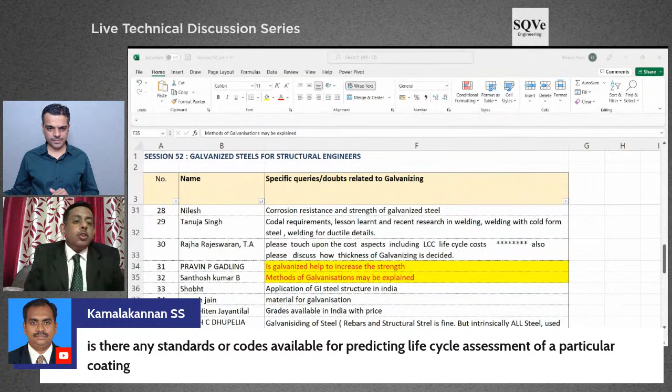Continuous galvanizing is for cold rolled sheets, which go for automobile or construction applications, where a coil goes through an annealing cycle to heat up the steel surface. After annealing, the surface is completely reduced so that you have virgin iron, which goes directly, without coming into contact with the atmosphere, into the zinc bath and comes out with the coating. This is called the continuous galvanizing process, which is very much required for cold rolled sheets used for automobiles and for roofing applications.

You'll see zinc galvanized steel roofing in a lot of places; those are made this way. Automobiles, like your car body, the roof of the car, are all made of galvanized sheets, and that is the galvanizing process. The second process is for constructions or where heavy engineering is involved; you'll see that the thickness of the strips is quite high, where you cannot apply the continuous galvanizing process.

There you need batch galvanizing, where you have better control, a slower process, but you get a good coating. In automotive or continuous galvanizing, the basic difference is the coating thickness is very low, about 8 to 10 microns, maximum going up to 120 to 140 GSM (gram per square meter). But in batch galvanizing, the GSM or amount of coating is quite high, above 200 in most cases.

In batch galvanizing, once you have the component, it has to be cleaned properly with degreasing or acid degreasing process. After that, you need to put some flux. Flux is an agent which makes a bond between the steel surface and the galvanized zinc. So you put the flux, and the flux-coated samples are dipped inside the liquid bath for some time. In continuous galvanizing, dipping is only a few seconds.

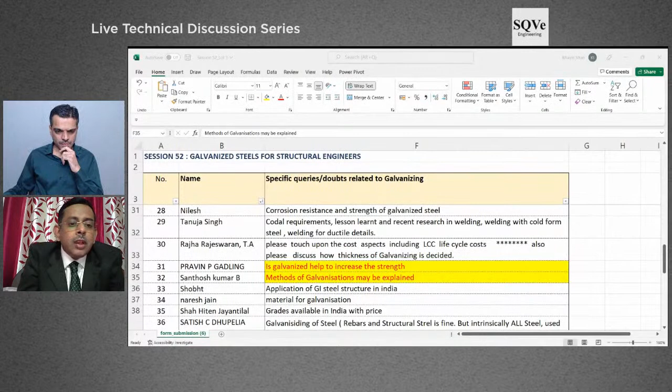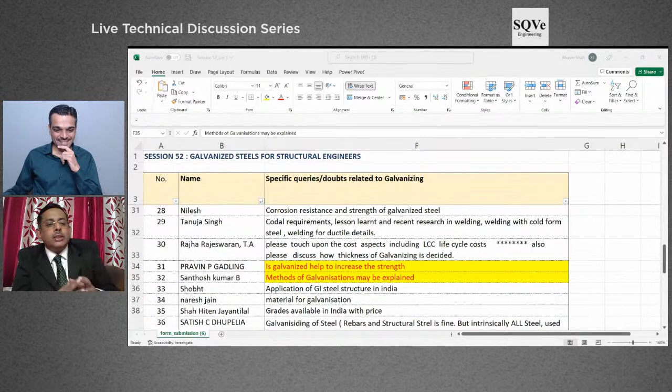I think that covers it, but if we go into the details of the process, it actually takes a longer time, and this session isn't enough because the process is, I think, a 20-25 day course. It's a semester process for this. So I tried to cover it, but there are a lot of YouTube videos you can always have a look at, and a lot of books where you can look at the process itself. But we can discuss the details in a longer session.

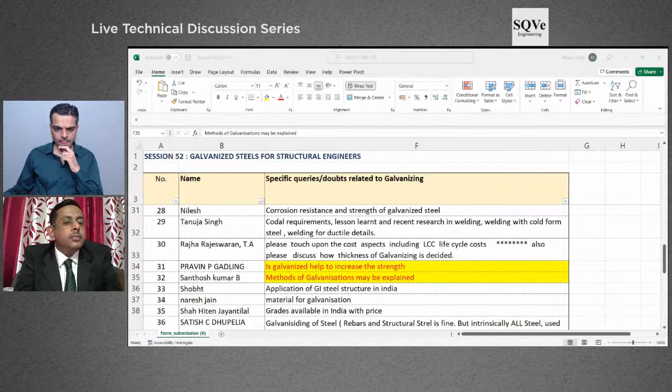The next question, which is highlighted, and I think someone also asked from the live chat, is whether galvanizing the steel will increase or decrease the strength for the structures.

Yeah, that confusion—when I started my career, I had that confusion too. Galvanizing practically has nothing to do with the strength. It does not change the strength. Whatever is your incoming material strength, you have the same strength on the galvanized part. Galvanizing is a process of coating something; it does not change the microstructure. It does not have any role in the microstructure because the hot dipping process is a surface phenomenon, done at 460 degrees, and normally for a few minutes there is no change observed in the steel metallurgy or microstructure. So galvanizing does not have any role in determining the strength of material or changing the properties of material. Galvanizing is a coating process to give you better corrosion protection.

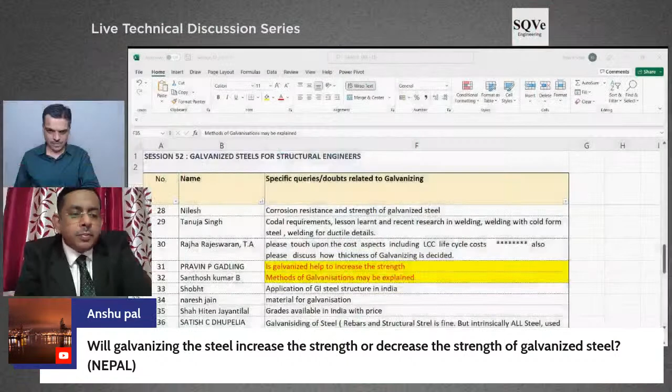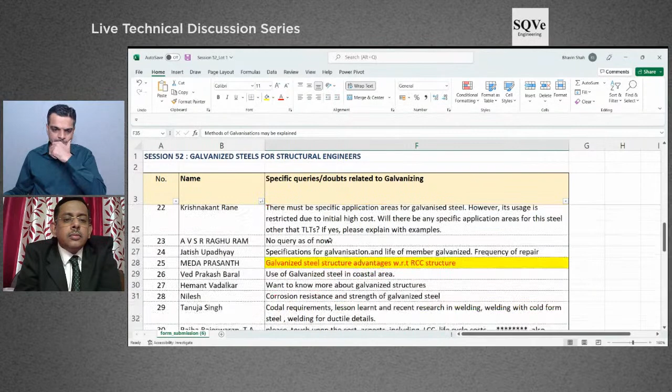There are a few interesting questions which are highlighted. I think we can take this one: what are the long-term benefits of galvanization?

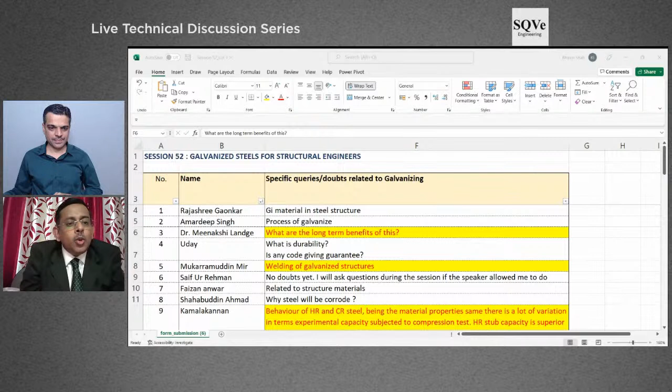Yes, long-term benefits. You are investing something because galvanizing is an extra process—you're putting something extra on the steel. Like add-ons: once you go to a pizza shop or any restaurant, if you ask for something extra, they will charge extra—extra cheese topping, extra sauce, anything is chargeable. Here also, you are putting an extra coating over the galvanized steel, so it is a chargeable thing.

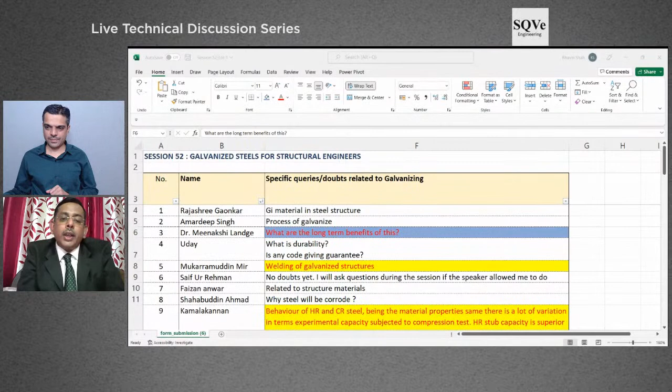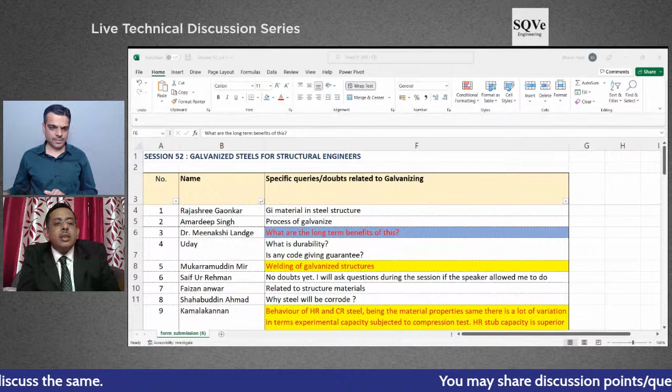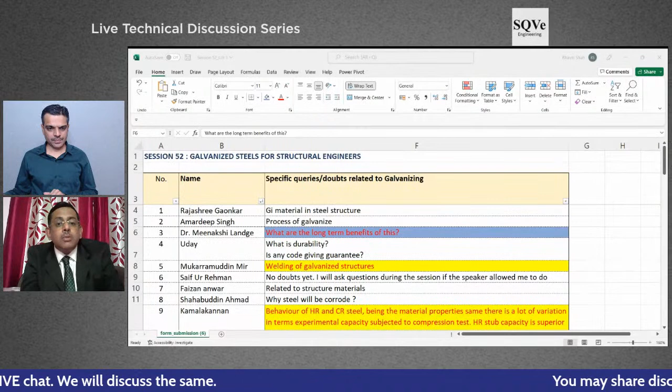But the long-term benefit is quite high, in terms of protection of the steel, because steel is a very precious thing. You are putting it inside your building, and you don't want to change it every 2 or 3 years. Steel will naturally degrade against the atmosphere because atmospheric corrosion will always take place, and nobody can afford changing the steel every 4 or 5 years since it is a structural part. Galvanizing helps in that area. Galvanizing increases, as per the technicality, 4 to 5 times your corrosion life. What needs to be replaced in 20 years can be shifted to 60 or 70 years.

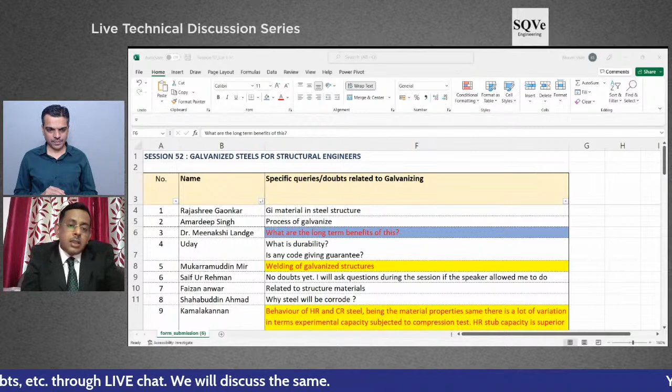Galvanizing means you are having good protection. Weathering, that means when atmosphere wants to react with the steel surface, it has to come across a barrier of 200 to 300 microns of galvanized layer. Then it can touch the steel. Like in a war, we always protect the king. In a chess game, the pawns cover the king. Here it is the same thing - others will get time before reaching your king. Atmosphere, meaning oxygen and other pollutants, will take longer time to penetrate because the galvanized surface is there.

Galvanizing increases the corrosion life of the steel surface significantly - not just a bit - typically 2 to 3 times, or sometimes even 4 times. Also, it increases the luster of the steel surface, giving an aesthetic benefit since the galvanized surface is lustrous. This improves the aesthetic point of view besides the corrosion protection. But mainly, galvanizing increases the corrosion protection manifold.

I think that answers the question properly. Yes, yes.

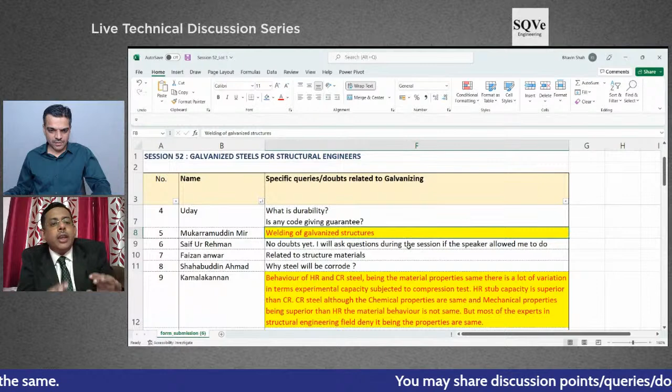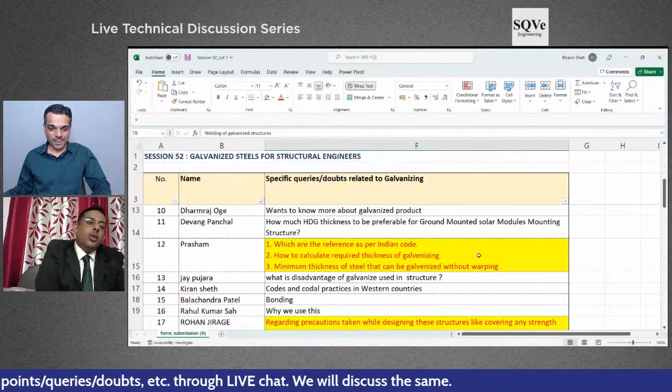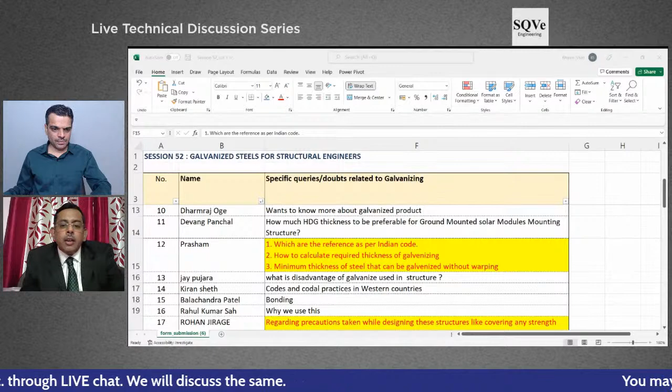Which are the references as per Indian code? There are many references, and most of them are adaptations of ASTM standards, which are most helpful here. I'll mention a few of the ASTM and IS standards. IS 4759 is the mother standard for it, and ASTM A123 is the base standard. Based on that, IS 4759 is adopted. There are a few other related standards, but these two need to be discussed thoroughly, covering coating relations, the relationship between microstructure and coating, and what sort of coating is needed for different sections. For example, under 2 but not less than 1.2, you need a minimum of 340 grams per square meter coating. These details are mentioned in IS 4759, along with the amount of sampling and what sort of tests you will be doing. IS 4759, therefore, is the basic standard for the galvanizing process, adapted from ASTM A123.

Then the second question, which I think most engineers are interested in: how to calculate the required thickness for galvanizing.

You don't need to calculate it yourself, because in most cases, once you buy it, there is already a calculation process - it will be specified how much GSM coating is given. By the eddy current method or other cross-check methods like metallurgical methods, you can verify that. Normally, 1 micron means 8 grams per square meter - there is a calculation, but it involves a lot of effort and errors can occur. Normally, through a test certificate, you can cross-verify that a given coating thickness corresponds to a certain GSM. There is a relationship between coating thickness in microns versus GSM, but ultimately, the test certificate will mention the GSM. By ASTM standard or IS 4759, the minimum value of average mass coating should be mentioned based on the sectional properties - for example, for a tube of 10 millimeter diameter and over, you need to maintain a minimum of 300 GSM coating, as given in the standards. So based on the test certificate, you can always judge what amount of coating has been given.

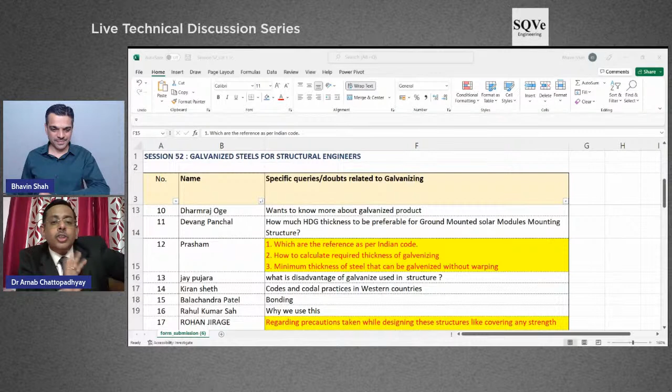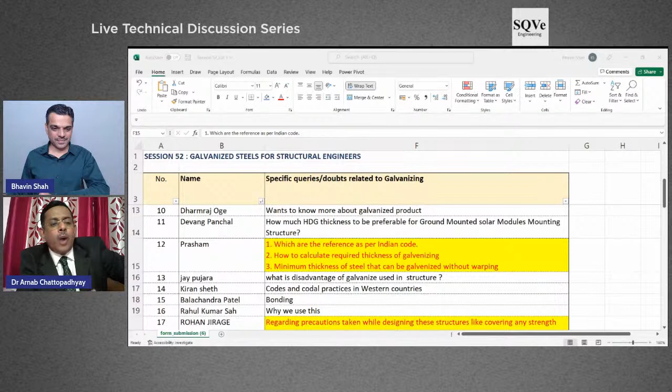The minimum thickness of steel that can be galvanized - for continuous galvanizing, I have seen 0.12 millimeter. Sometimes thin sheets for roofing or automotive dooring applications, around 0.1 millimeter galvanized steel, can also be galvanized. So thickness is not really a problem. But you cannot do this in batch galvanizing because it is not economically viable. However, in continuous galvanizing, many steel plants are producing 0.1 or 0.2 millimeter steel day and day out.

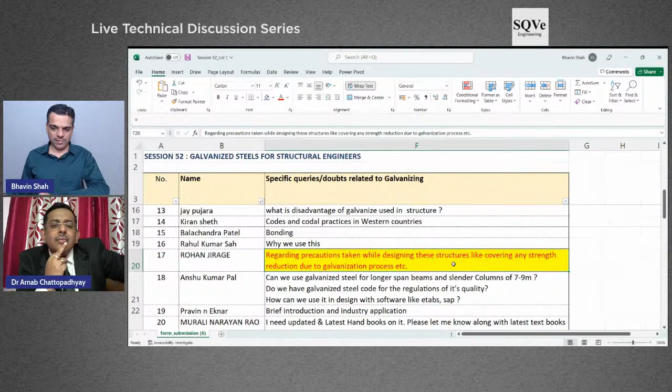Okay, I think this question is answered, right? Regarding precautions to be taken while designing these structures, like covering any strength reduction due to the galvanization process. Yes, galvanizing has nothing to do with the strength.

This galvanized steel structures' advantages with respect to RCC structures - yes, very interesting question, because India has started using galvanized rebars in place of plain rebars. There is a plant, I think in Punjab, producing successfully. This galvanizing structures topic is also interesting. Number one, it does not change the requirement of RCC structures, because whatever the basic requirements are, all are satisfied by galvanized structures, used in terms of bond strength, cement to steel ratio - there is no change.

But what is changing is the corrosion life. It increases 4 to 5 times inside the cement or concrete atmosphere, which is a kind of basic atmosphere. The advantage of galvanized steel is that it gives protection in a wide range of pH. We are aware of the importance of pH. From about 5 to 11 pH, all galvanized structures are stable, which is not possible with bare rebars. Bare rebars will always corrode inside the concrete, but galvanized structures don't corrode.

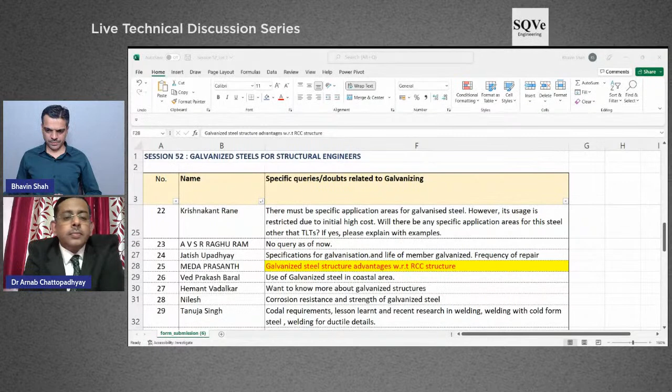This quality of steel used for galvanization - can we take up this point? Yes, good question. Quality as per the requirement should be determined, because you need to have your own quality requirement. For galvanizing, anything and everything can be galvanized.

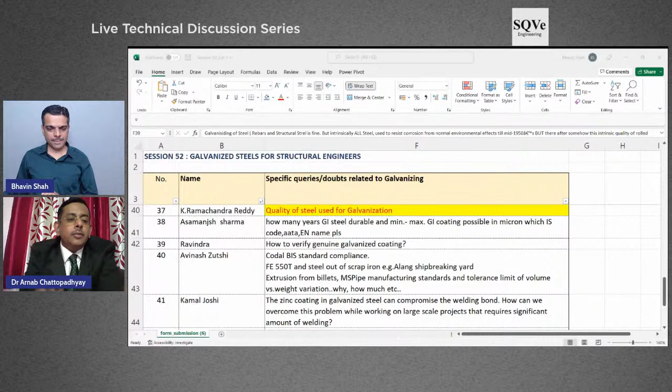You go to ASTM standard, it is written that anything can be galvanized. The thing is, what is your requirement? What sort of steel are you using - high strength steel, structural grades where you need fatigue strength properties? So you will determine your steel, and all steel can be galvanized in a batch galvanizing process.

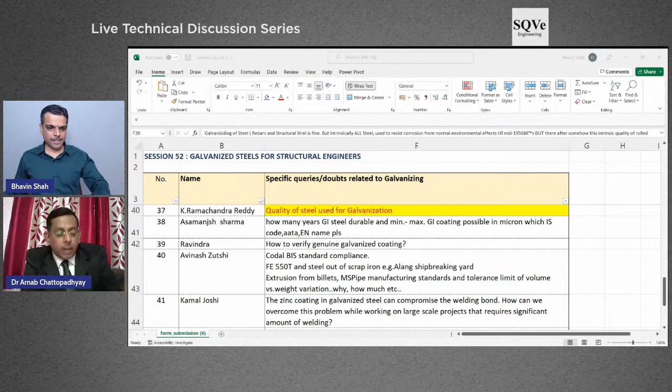There are limitations for steels in the continuous galvanizing process, because some high strength automobile steels are not very well continuously galvanized. But in case of batch galvanizing, most steel works, even though there are some problems with silicon steels, because silicon reacts with zinc, called the Sandelin effect, which causes problems for the galvanized surface. But those can also be handled.

So most steels, even high silicon steels, can be galvanized. It is your requirement to determine what sort of steel you are using - all, at the end, can be galvanized.

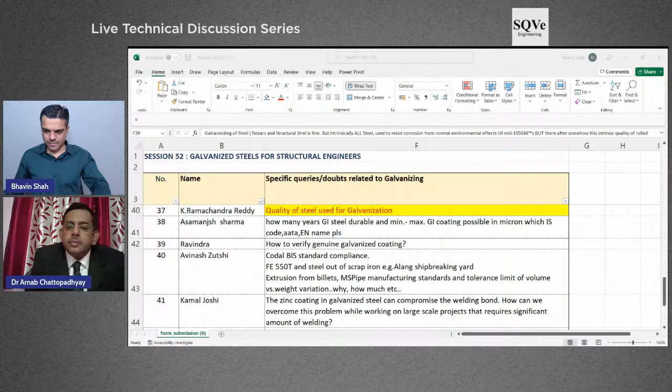I think you answered this question, right? How about using galvanized reinforcement steel at coastal areas and coastal foundations? I will tell you - zinc has very interesting behavior in the coastal area.

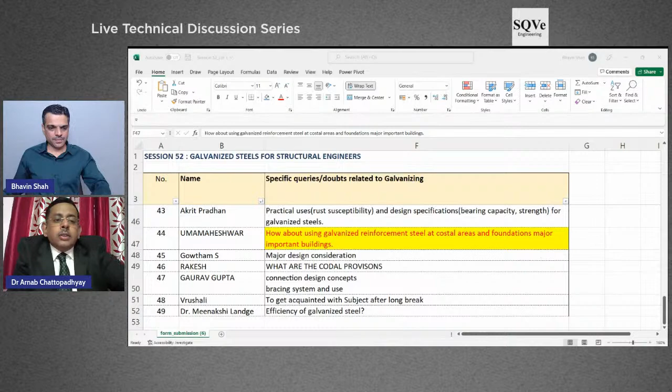There are a lot of studies done in India also by government organizations that put different structures in different places in India. India has a lot of coastal areas like Bombay, Mumbai, Chennai, Calcutta - most metros are near the coast where sea shore is not far, and galvanized structures have proved very protective compared to normal structures. Saline atmosphere is very dangerous for any steel surface because steel has no protection against saline conditions, whereas galvanized steels in coastal areas produce at least double the protection compared to bare sheets.

So galvanized sheets give a lot of improvement in coastal areas compared to bare steels. This is already proven, and in Indian conditions a lot of study work is already there in the public domain. You can look to see what advantages galvanizing produces in coastal areas.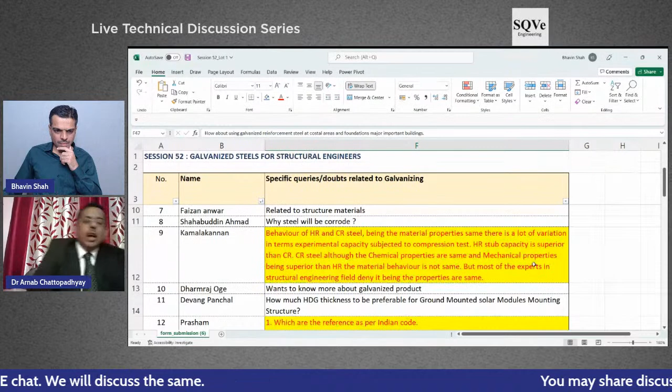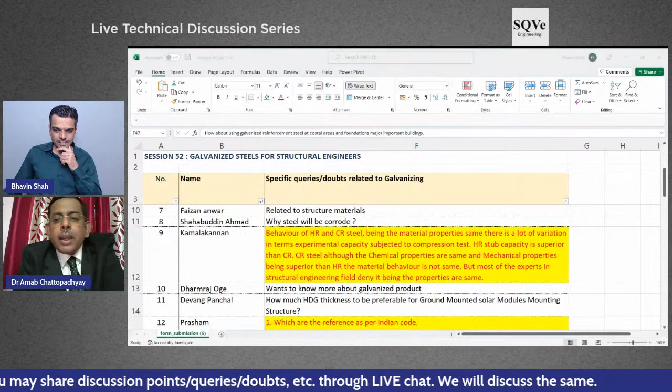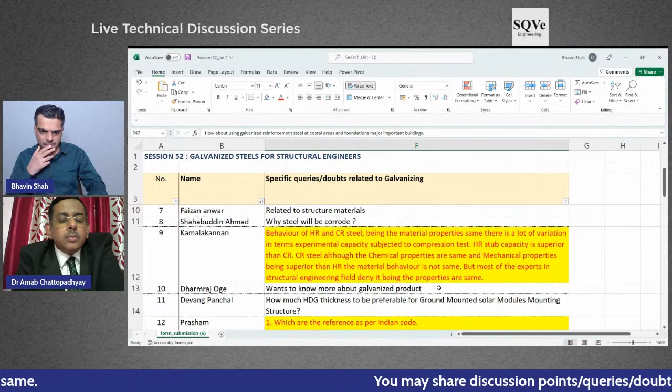I don't know whether that person is online or not. I would like to get more clarity about the question because HR and CR are very difficult subjects to handle. I need better clarity on this subject. What Mr. Kamalakannan wants to say about behavior of HR and CR steel being material properties - I'm not very clear about the question, what he wants to say, because he made some comments instead of a question. So if he's online, then let him clarify this question with more details. Then we'll take it up.

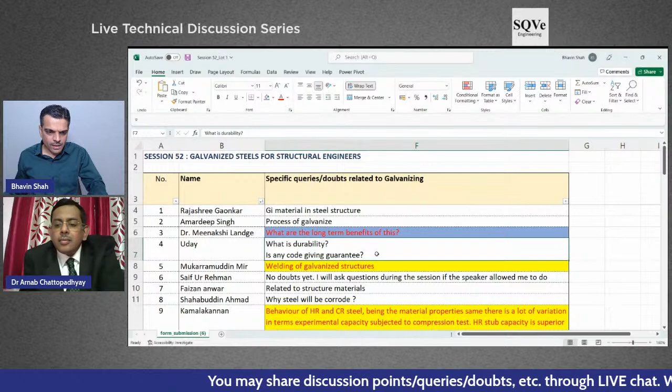So Uday has put up this question about the durability - what will be the durability when galvanization is done?

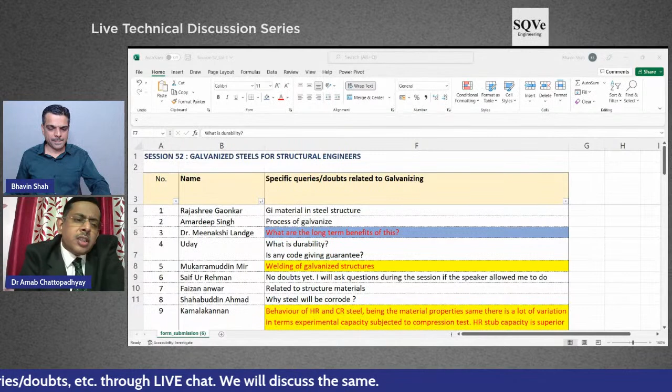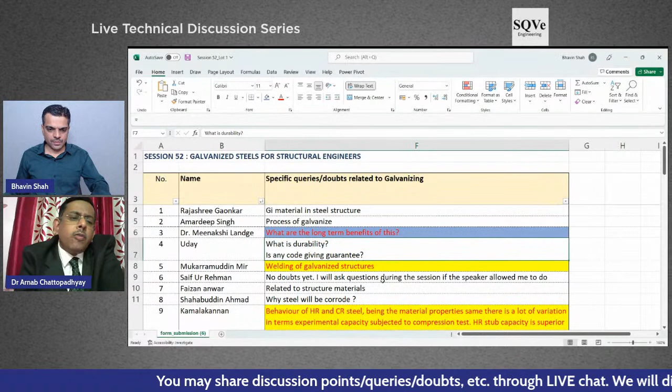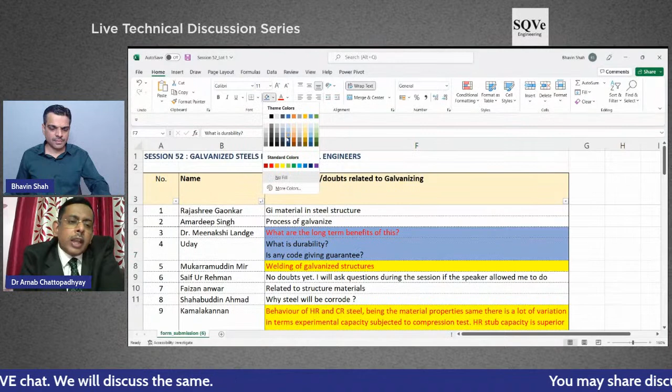It depends from situation to situation, because actually there will be no guarantee clause on your products. But galvanizing gives you 2 to 4 times life based on the areas. If you have a highly polluted industrial area, you can get double life, 2 times the normal life. Or in a normal domestic area where there's not much pollution, not a saline atmosphere, you can expect 4 to 5 times. In a city life like Mumbai, Calcutta, or Chennai, you can expect 3 times more life expectancy than the normal RCC structure or normal structures.

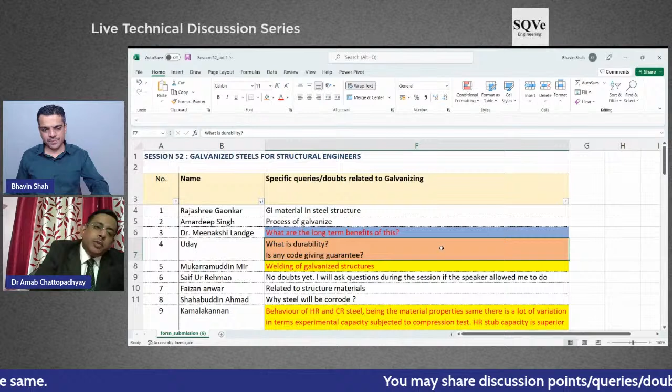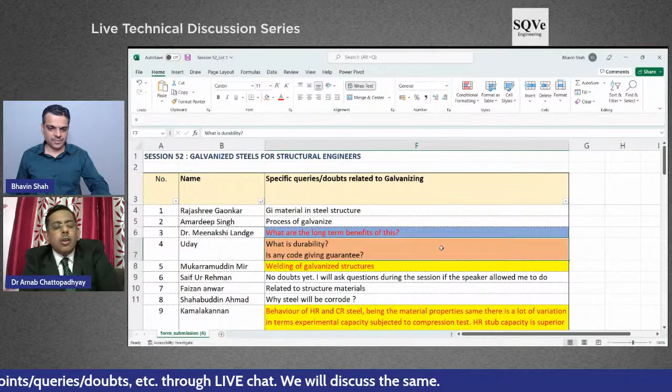It depends on what sort of pollutants you have in your atmosphere, what sort of salinity in your atmosphere, what sort of temperature cycle you are having - like some places have a huge temperature difference between summer and winter, and what sort of precipitation or amount of rain in your area. So there are a lot of factors, but ultimately in any place, minimum you will get double the life expectancy than bare steel structures. That is minimum.

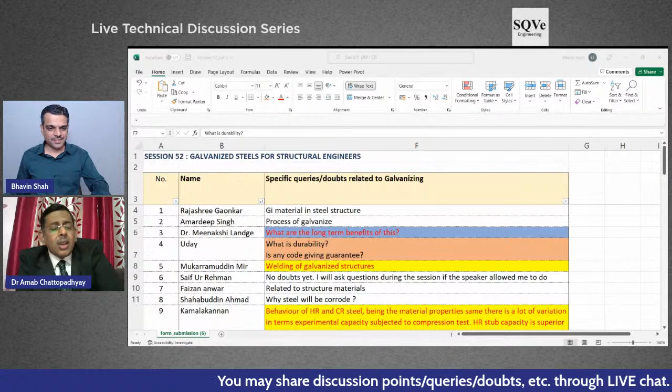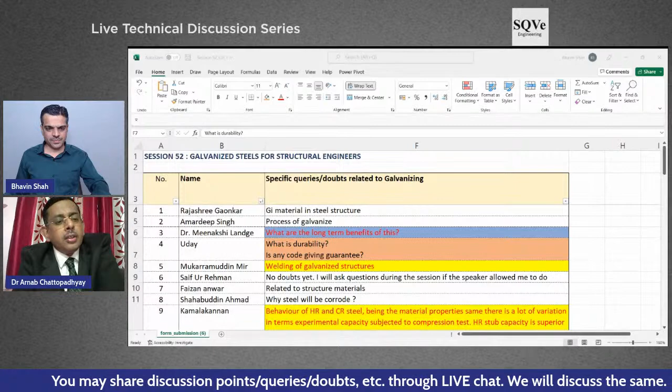But for guarantee clause, you can test it at different conditions. I'm sure, but nobody gives a direct guarantee because a lot of issues can happen during exposure, because studies specific to different atmospheres are important, which are not done properly. Second part is that during handling, a lot of scratches can be generated, and those will hamper your corrosion life. That is why manufacturers normally do not issue any guarantee certificate. But as a general understanding, general science says it is at minimum double the life of bare steel sheets.

Like doctors, when they prescribe you medicine, they don't give any guarantee that you will be out of the fever or disease in the next 3 days, because how is your lifestyle, how you are practicing, and how you are taking the medicine - those things are very important. So they give you medicine so you can get rid of the problem very easily or very soon, but they don't give any guarantee that it will be over in 3 days. Same thing is here - a lot of conditions, a lot of handling issues are there, but general understanding is that you will have double the life expectancy when you have galvanizing. But it sometimes becomes prolonged if you have proper usage and proper atmosphere.

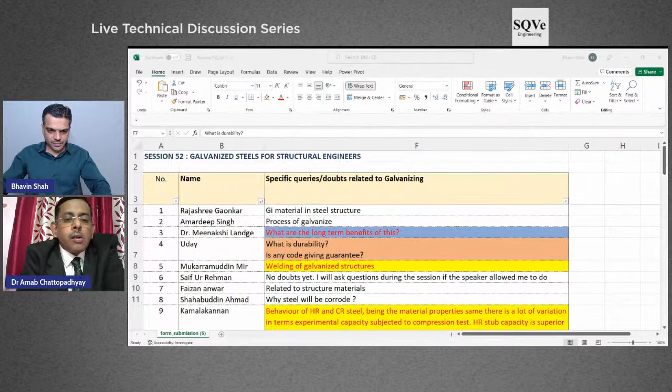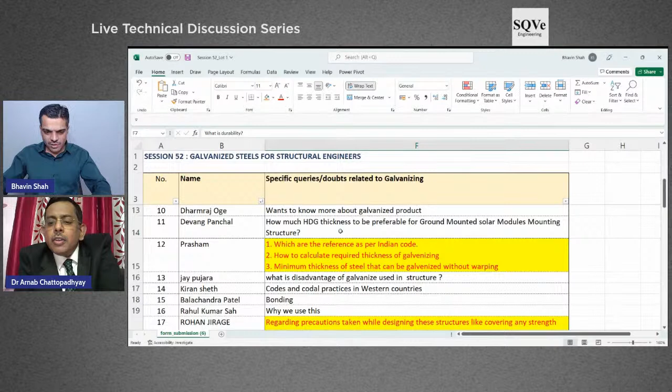Yes. Now, can we take up welding or anything else? Sure. So before we get to welding, I think I am not able to locate that question, but there was one question related to what will be the quality assurance criteria for galvanizing.

ASTM A123 or IS 4759 talks about it. Number one is the surface finish. Quality assurance first - there should not be any surface problem, there should not be any defects. Surface should be even, and minimum and maximum coating thickness should be mentioned - if you have a coating from 300 GSM to 600 GSM, what is your minimum value, what is your maximum value you are offering?

Is there any defect at the surface which is visible? What is the strength after the galvanizing? Because there is a chance that galvanizing bonding may be a problem, so what sort of strength are you getting after the end of galvanizing - those things should be mentioned clearly.

First is the surface finish - what sort of surface you are having, is there any visible defect, any mark, any scratch marks? Second part is the amount of coating you are having, that is the minimum value and maximum value, because it is a range - nobody gives you a continuous coating, it will be having a minimum to maximum range. And third part is the strength of the steel you are offering. These are the minimum quality checks you must be having for any galvanized steel surface.

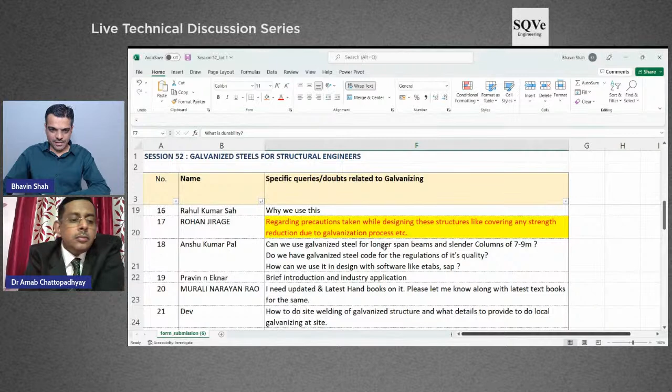Now we can talk about welding of galvanized structures. Welding means joining two metal surfaces, joining of the steel surface, but now it is coated with galvanizing.

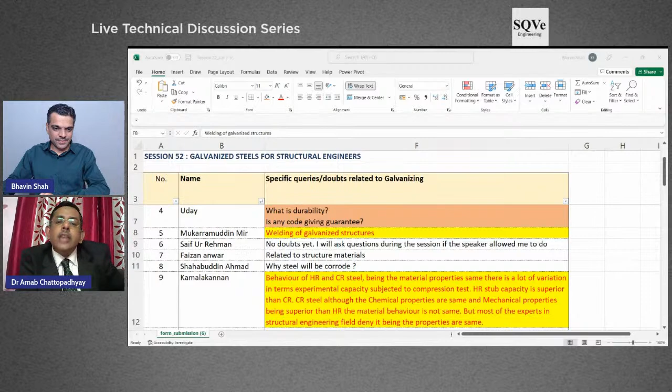There are a few things to consider: one is the technical aspect, another is the safety aspect. Technically, if you are planning to join two steel surfaces, you need to remove the galvanized coating from that part. There are standards available on how to remove the zinc from that area, then you do the gas welding or any type of welding.

During welding you will have some zinc fumes, so from a safety point of view you must be covered enough so that you don't inhale any zinc fumes.

Once the welding process is done, you again need to re-galvanize that place by the process of zinc painting or spray painting, because you cannot leave that place bare. Since your adjacent areas are galvanized steel, you will have a two-material concept there - one is zinc, another is steel - and that place will have rapid corrosion if you don't protect it.

I hope you are understanding my point. Once you don't cover the place with galvanizing or zinc, you will have a bare steel surface, and your neighbors, meaning adjacent areas, are galvanized. So you will have bimetallic conditions there, which will increase and enhance the corrosion process.

So welding will be the place where you will find corrosion if you don't coat it properly with zinc afterwards. So the first process is that you need to remove the zinc before you do the welding.

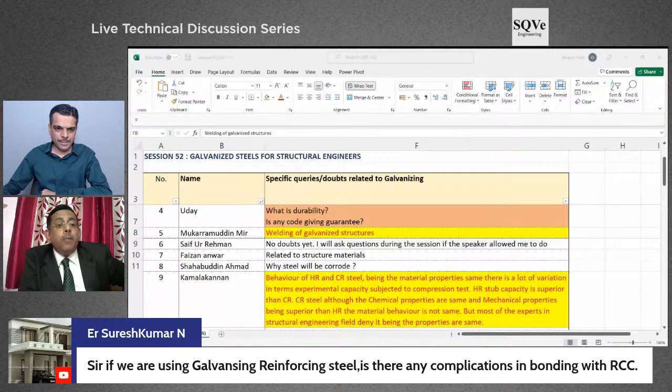Good question, I have already discussed this, but for your thinking I can explain it again. Actually, there is an improvement in the bonding process, because cavitation and other things that would be important there will not be taking place. I can give you some reference - if you allow me, I can show a particular slide.

One minute. Yeah. Is it possible to share my screen? Yeah, you can click on the plus present button at the bottom of your screen. Can you see my screen? Yeah, it has come now.

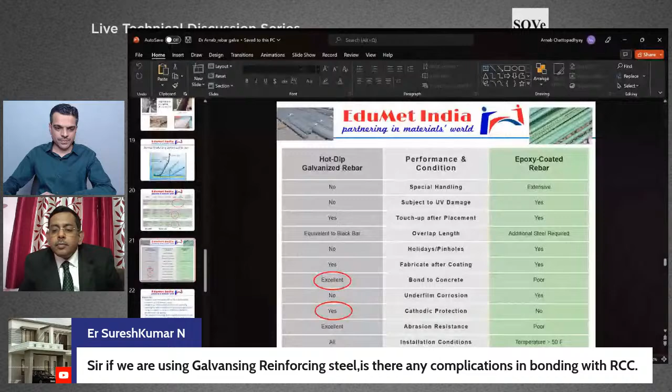So you see that it is a comparison between epoxy coated rebars and hot dip galvanized rebars. You will get most of the conditions better - bond to concrete, cathodic protection, everything is far better than the normal or epoxy coated rebar.

I have the reference for these slides - it is from the American Galvanizers Association. I think that gives a clear idea of what sort of improvement we will be expecting from galvanized rebars over epoxy coated or normal rebar. Is it okay? Yes.

Just let me share the file again. Yeah.

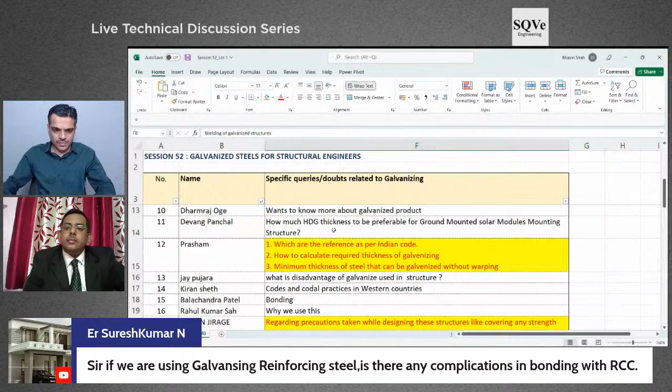Devang has asked this question: how much hot dip galvanized thickness may be considered for the ground mounted solar modules mounting structure? It is not specified for anything ground mounted - it depends on the thickness.

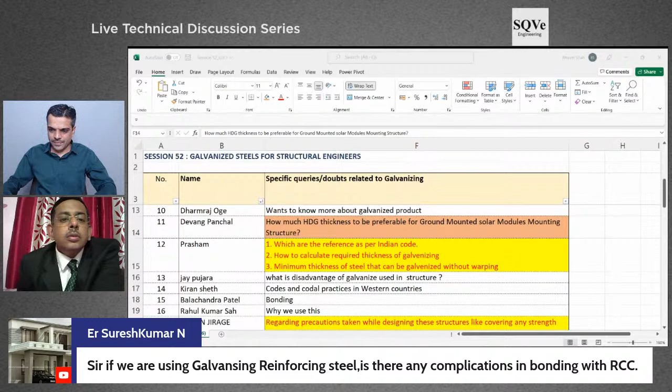Again, I can show you some ASTM standards which I have with me. I'll show you - one minute.

Is it visible? Yeah. This part clearly tells that for what sort of thickness, what sort of zinc coating you can have.

We are not able to see this document. We are able to see only the screen where different PPTs are mentioned. Okay, let me stop this, sorry.

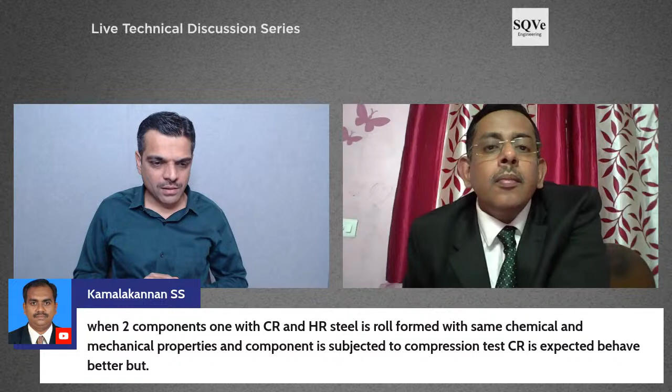Meanwhile, Mr. Kamalakannan is online, clarifying a question: when two components, one with CR and one with HR steel, are roll formed with the same chemical and mechanical properties, and the component is subjected to a compression test, CR is expected to behave better. But we had a scenario where HR was better than CR. Is it really possible?

CR has severely plastically deformed material, and that is the beauty of CR. You will always get better CR properties because you are plastically deforming it and getting solid strengthening there. So CR will be better. To have a better HR than CR, you need to change your metallurgy. Composition-wise you can overcome it, but with the same metallurgy, CR will always give a better property than HR in this case.

As I know, there are some confusions with HR and CR. This depends on the application part - why you are going for HR, why you are going for CR. It is material selection which plays an important role here, and that needs a big session on why we go for CR and why we go for HR, what are the advantages of both types of steel, what HR actually means and what CR means. That takes a longer session. But in a one-to-one comparison for the same steel, HR will have an inferior property than CR. If you want to improve HR, you need to work on your metallurgy.

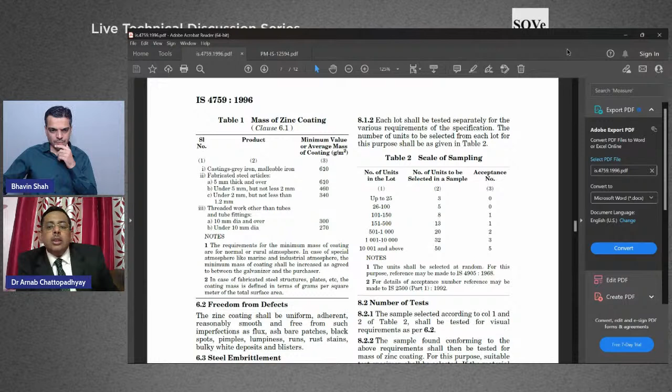Is it clear? It is about the cross section they are talking about. For a given section, you need to maintain this amount of coating - it is not talking about where the application is. Your engineer knows the application and what sort of steel thickness you will need. Once you are fixed with your steel thickness, you can go back to the galvanizer, and as per the standards, they will recommend what minimum thickness they should maintain. Is it clear? Yes.

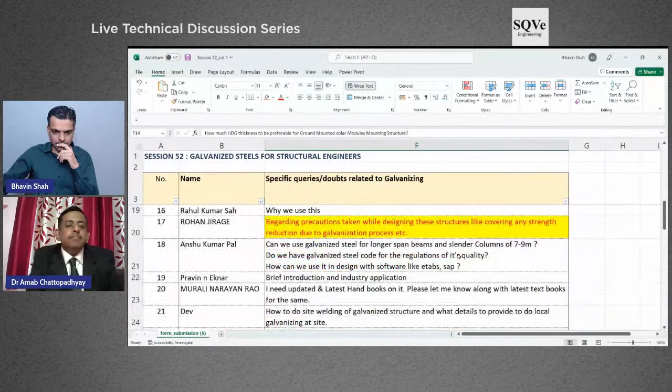Let's see if a couple of questions are remaining. I think Jatish is asking about specifications for galvanization and the life of a galvanized member, and what may be the frequency of repairing. As I said, it depends upon several factors, but at least you can expect double or triple the life.

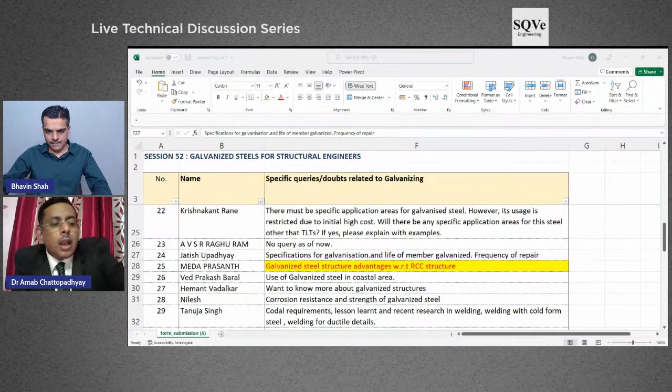I can show you one more slide, give me a minute please. Yeah, sure. Yeah, this is very interesting.

I think that gives you a good idea about what sort of advantage you will be getting. Initially you may be investing some amount of rupees, but the outcome will be tremendous. Is it clear? Yes.

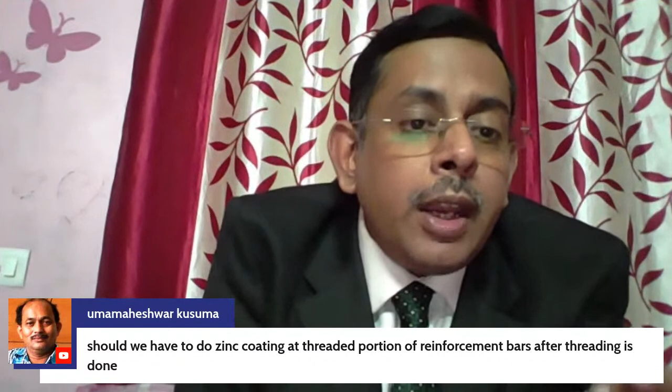One question: should we have to do zinc coating at the threaded portion of reinforcement bars after threading is done? After threading, if you have a zinc peel off, you need to put some zinc spray painting or zinc coating. Don't leave any place uncoated once you are using galvanized sheets, because that will create a condition of bimetallic corrosion, which is very much unwanted.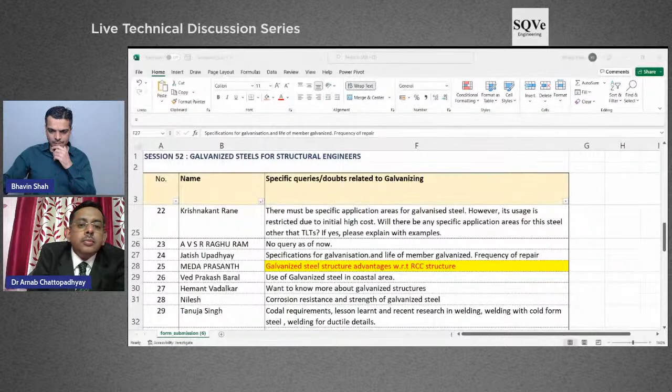Use of galvanized steel in coastal areas - already discussed that corrosion increases in the marine atmosphere, so corrosion resistance is important there.

Codal requirements, lessons learned, and recent research in welding with cold form steel, welding for ductile details - I think it's everything related to welding. Yes.

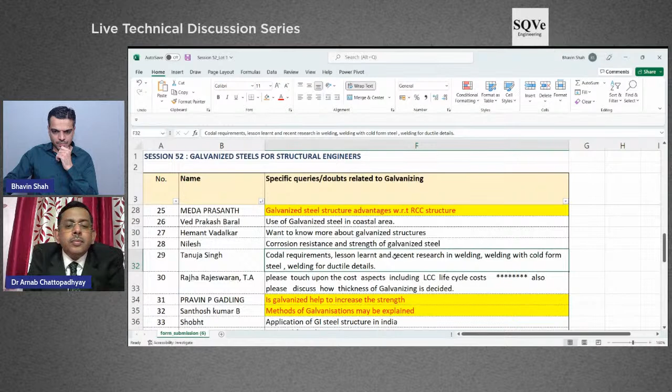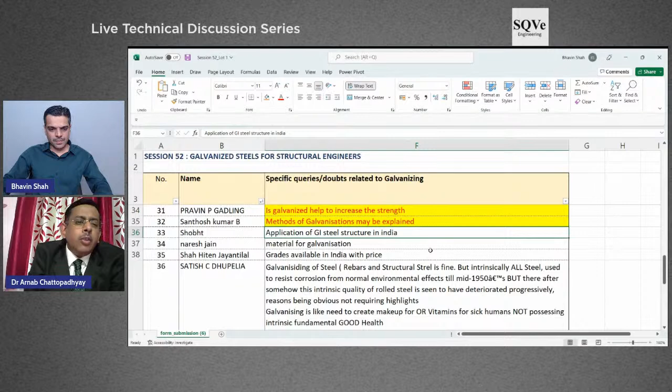Application of GI steel structures in India - yes, I told you GI steel structure is galvanized steel structure. The biggest example is the Lotus Temple, Delhi. There is another temple coming up in Vrindavan, which I could not recall the name of, which will finally be in place by 2025, fully reinforced with galvanized sheets. Lotus Temple is the biggest example of galvanized steel structures in India. There are others coming, and you have a plant for galvanized rebars already placed in Punjab. A second and third plant is also going to come up, so people are now getting matured to use galvanized steels over bare rebars.

This is a question in a similar line but mentioned differently: the zinc coating in galvanized steel can compromise the welding bond - how can we overcome this problem while working on large scale projects that require significant welding? The basic answer is the same. One, you need an efficient welder. Second, before you do the welding, you need to remove the galvanizing from that portion. Once you are through with the welding process, you need to put some zinc rich coating or zinc spray painting over there. Don't leave that place bare - that's the key for welding of galvanizing products.

One more interesting question: how about drilling holes in galvanized structural sections, let's say for bolting - any precautions to be taken? Yes, because during drilling you will have some zinc peel off. Again, don't leave that place bare, because those places will initiate cracks, called galvanized corrosion cracks. If you have a bare place, bare steel, that will initiate corrosion and ultimately create the crack. So if you have any bare place, put some zinc rich paint over there so that the entire place becomes zinc painted.

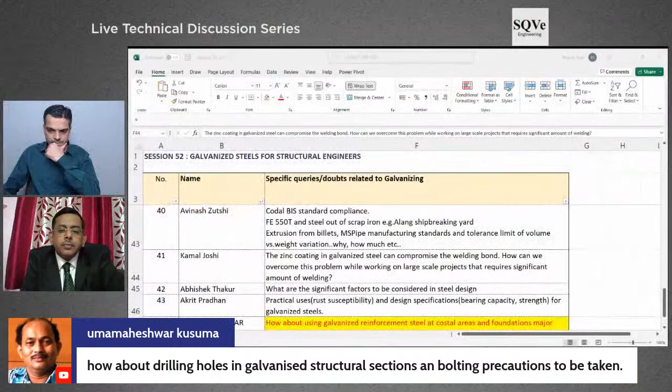There is another question from Mr. Kamalakannan. Is there a role for spangles with respect to strength other than aesthetics?

There is no role of spangles other than aesthetics. As experts of galvanizing, we always teach our customers don't use spangles. Spangles are not good at all, these are potential places for corrosion. There are customers interested in spangle sheets because they look good, giving a natural aesthetic, but ultimately those are not good. They are very good looking.

Sometimes good looking things are dangerous. Those are the potential places for corrosion. Zero spangle materials are far better in terms of corrosion protection than spangled ones. Spangles have nothing to do with strength, but spangles are not used in structural applications, only for roofing applications.

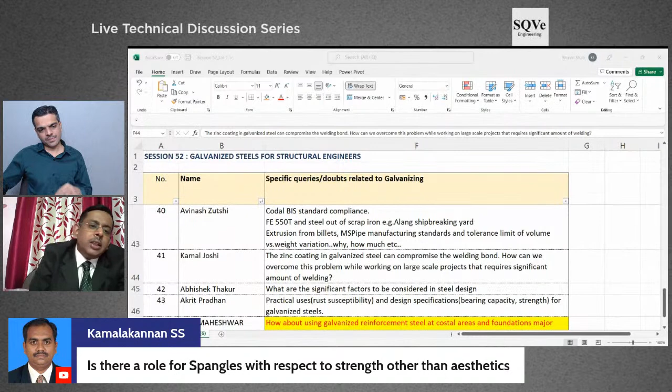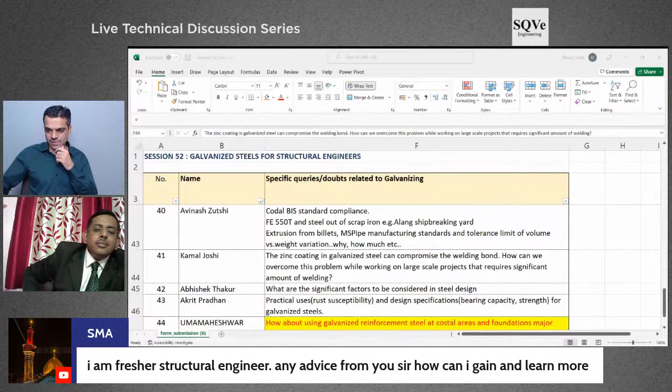Yes. SMA says, I am a fresher structural engineer, any advice from you sir? How can I gain and learn more? You can connect with me separately, we can discuss related to this.

I think people now have some clarity about the subject. Yes, it's a very good discussion. So at least one thing is very clear, as you rightly said, that everything needs to be galvanized. No combination should be done. Yes, that's the most important part.

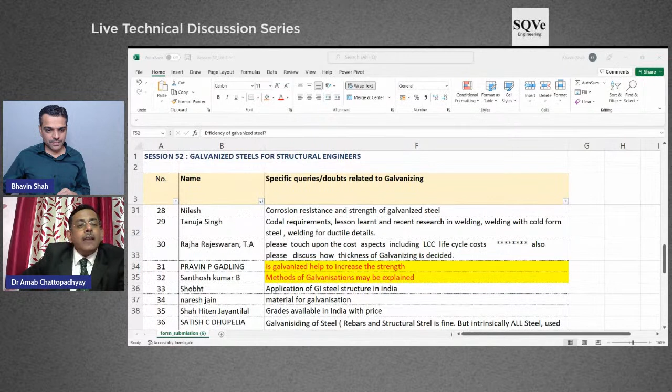Definitely. And the second thing is that you will have an increase in life, but how much depends on how you are practicing it. And that's a very interesting, difficult decision to be taken in terms of life cycle cost during the initial stage. As you rightly said, there are several factors which need to be considered for predicting the tentative life cycle cost, so that we can take appropriate decisions in terms of the coating, right?

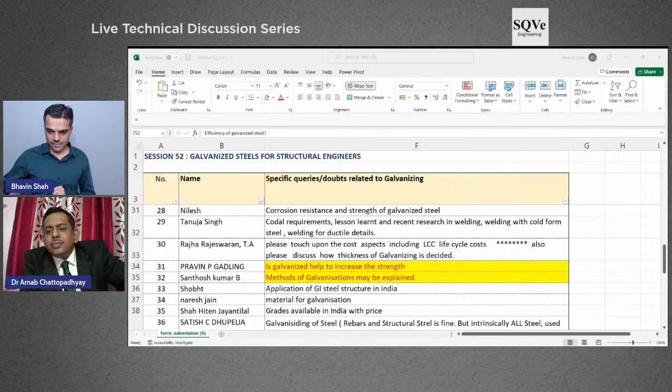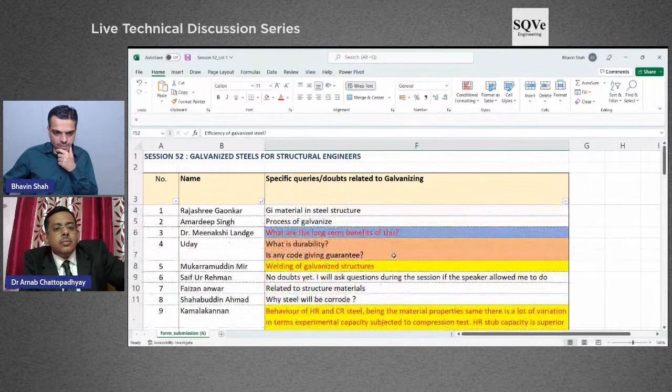Right. I think we have covered almost all points, what we received through the registration form. Bonding we have discussed, okay. I think we have touched upon all points. Efficiency of the galvanized steel.

Efficiency, yeah, the last question. Efficiency in terms of corrosion. Yes, it is quite efficient. It is saving your material.

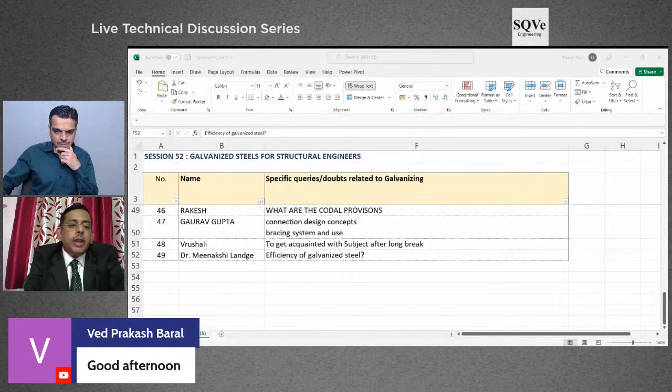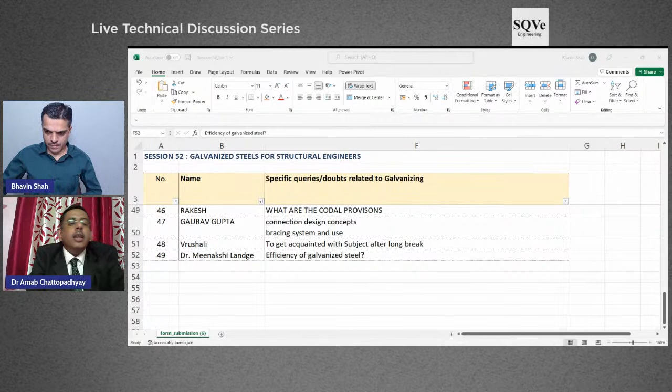That's the best thing because after so many efforts you are making the steel, and the steel will be lost in a few days if you don't protect it properly. So galvanizing itself increases the efficiency of the steel structures in that sense. In an aesthetic sense also it is efficient. I don't know if you are mentioning anything else, but obviously in terms of corrosion efficiency and aesthetic efficiency, it definitely increases.

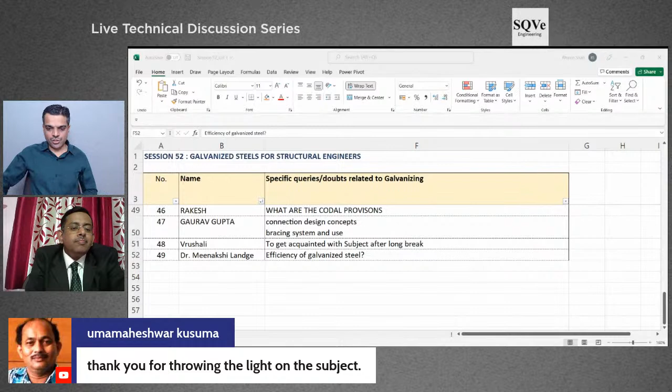Okay. It's telling, thank you for throwing light on the subject. Yes, but we need a detailed discussion on this subject thoroughly to give a brief, good introduction about the process and what factors affect this. So I think this is a good session for you to get a good idea. With this, we will go back and have a longer session so that we can generate more queries and have more clarity on this subject. That should be the approach.

Any point on the passivation process and its importance on strength? Strength has nothing to do with passivation, number one. Passivation is a temporary protection process. Especially in the case of India, it has a good role.

Because maybe you are producing steel in Jamshedpur and sending it to Chennai, or maybe one is in Jaipur and you are sending it to Guwahati. For long distance travel by road, there are chances of temporary corrosion deterioration on the surface. So in order to protect that, we need to put some passivation over the steel surface. Passivation has nothing to do with the strength of the material, but it provides temporary corrosion protection.

Ved Prakash is asking, if we use a galvanized steel bracket on a powder coated aluminum profile fixing, will there be an issue of bimetallic corrosion? It is already aluminum profile fixing, and you are using galvanized. Yes, there will be bimetallic corrosion because you are having two metals. Whenever there are two metals, even between gold and silver, there is bimetallic corrosion. So if you have a two metal system or three metal system, you are always inviting bimetal corrosion.